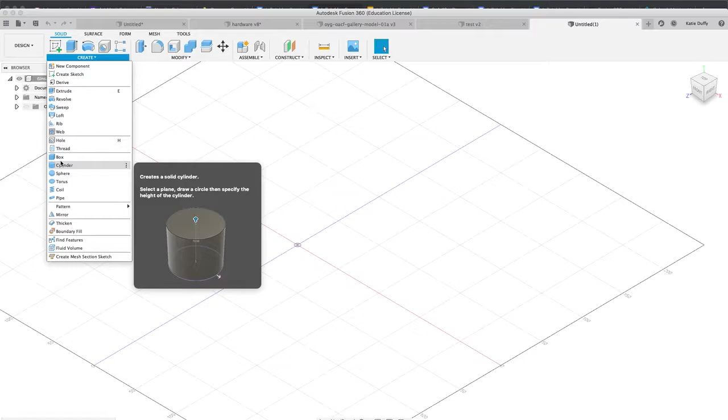So I'm gonna grab a box, okay? I'm gonna select the plane I want to work on, this bottom plane here, and I'm going to draw this box. Right now I'm in millimeters. I'm gonna switch it over to inches because y'all will have an idea of how much material you have, right? So I'll switch it over to inches over here.

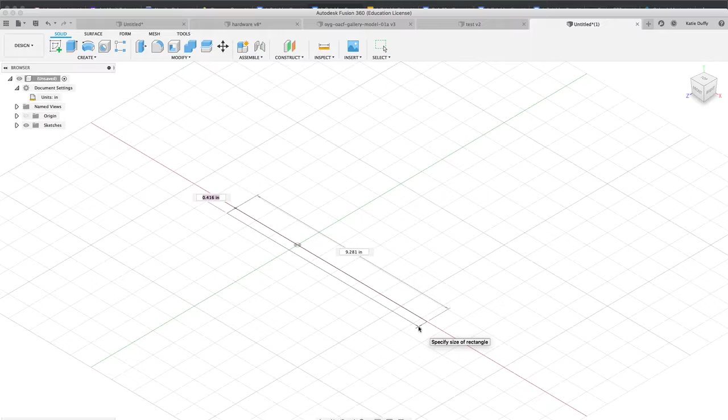I'm gonna grab my box again, okay? And maybe I want this to be like an 8-foot briefcase. So you could do it to scale, right? Maybe you do like 8 inches and then we can kind of blow it up, right? So think about your own scale. You could also do it as big as you want, right? So you could actually make it like an 8-foot box. I'm just gonna kind of eyeball it for right now.

Just think about your dimensions as you're making this, just because we're running out of time. Does that make sense to everybody? So like if you're doing 8 feet, maybe you do 8 inches, okay? You could absolutely do — what's 8 times 12? Art kids? Yeah, so you could do a 96-inch box, okay. But for the time being, I'm just gonna kind of wing it right now.

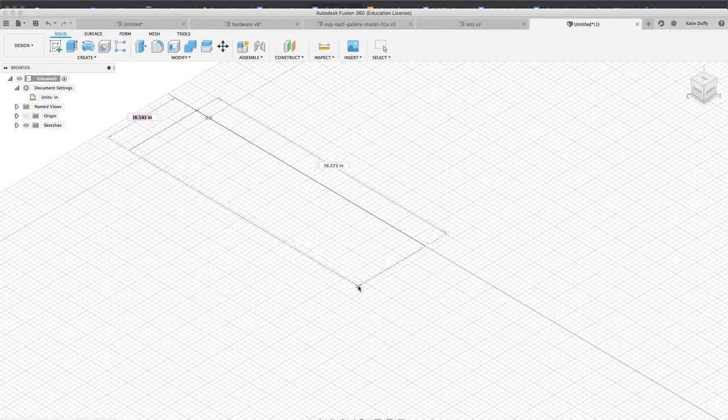All right, so I'm just gonna build up — this is gonna be my main briefcase. It's kind of briefcase shaped, perhaps. You're done — almost. But like a briefcase has, like, yes, but you would lose if this is what you submitted, okay? So what I want is, I'm kind of thinking the briefcase has like 2 parts. It has a latch, right? There's usually kind of a bevel in the middle. So that's what I'm gonna build next.

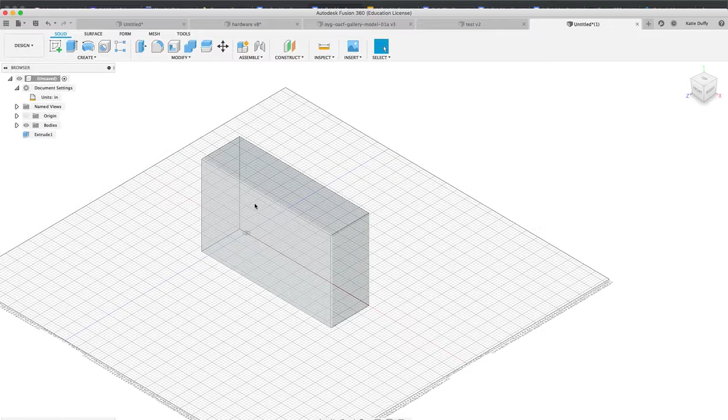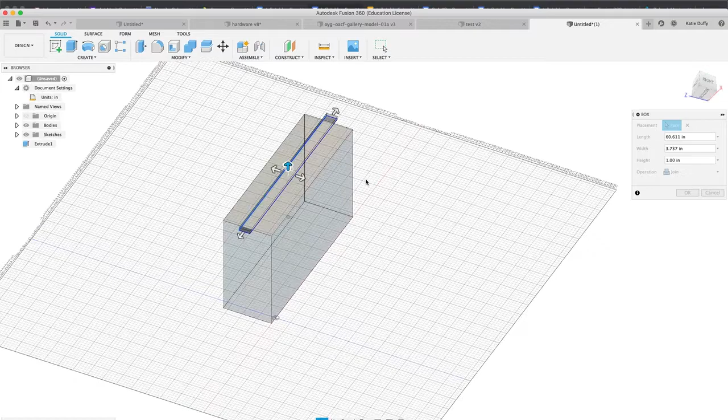I'll grab another box. Again, I'll select this front plane here, okay? And I'm gonna put this box in the middle. It's gonna be a little thinner. It's gonna hang off the sides a bit, okay? And then I'll pull it down.

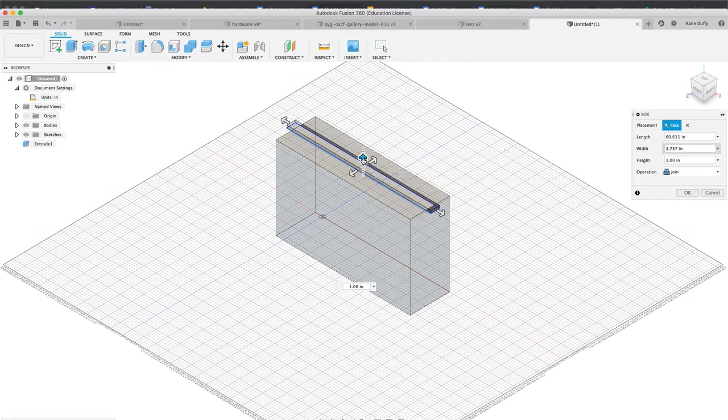This is moving so slow and it's throwing me off. I'm holding down Shift and the middle mouse button. And if you ever get lost, like I'm getting lost, if you hit this little home icon, it'll switch it up for you again. Okay, so I'm gonna pull this down. Right now I'm holding Shift and using my middle mouse button to move it around, to orbit, yeah.

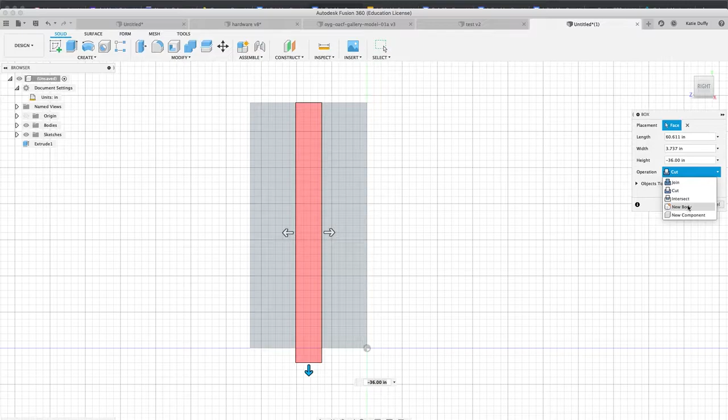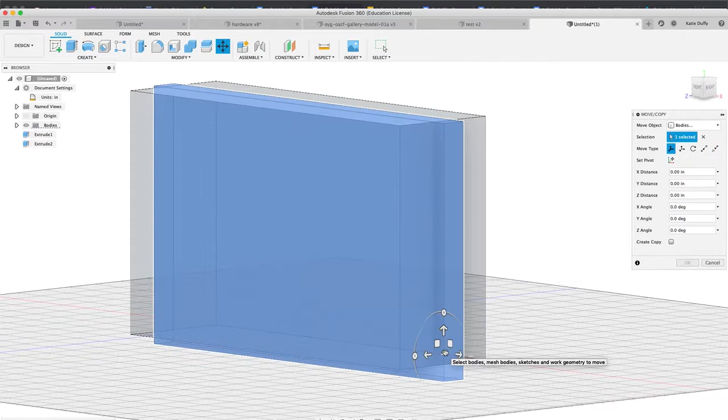So I'm gonna put this one up here, okay? And I probably want to drag this one up, so I'll move this down a bit. And I don't want to cut it — I want to make it a new body right now because I want to move this a little bit. Okay, so I made it a new body, so now I have just these 2 shapes, okay? So I'm going to move this one up a bit because I want that ridge to go up, so I'll do move copy. I'm just right-clicking on the form, selecting the form, and moving it up a bit. Oh my god, this is moving so slow. Okay, move it up a bit. Okay, so that's kind of my ridge that I'm going to use.

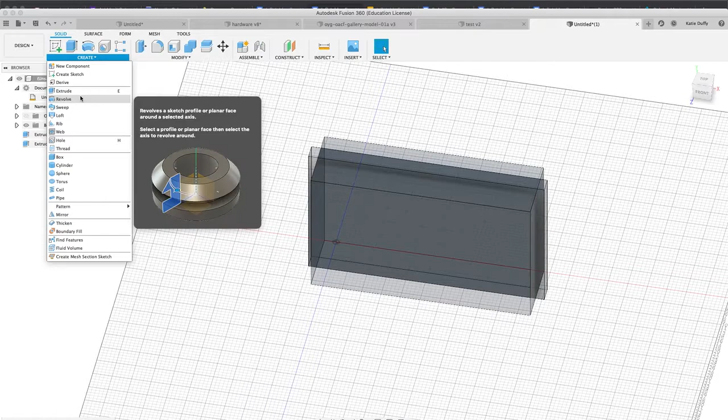And now I need a handle, okay? So I would recommend, again, just using your rectangles to make a handle. So what I'll do now is I'll grab another rectangle. I'm going to select this top plane to work on where I want to put it, so I'll select this here. I'm going to go to the top, and I'm going to make it about here. All right, so this is going to be one part of my handle.

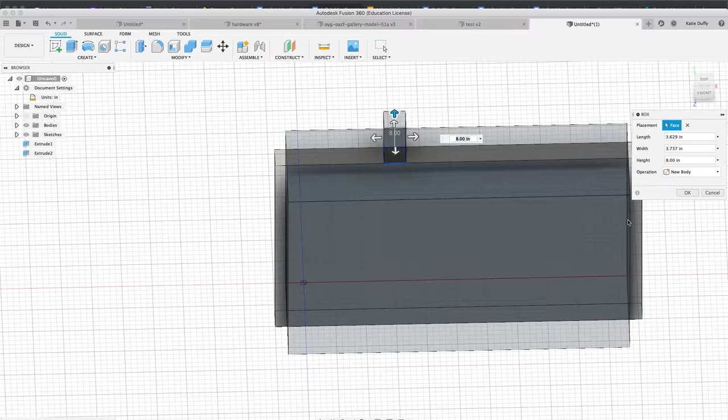Okay, and I'm going to do new body on everything, and then I'll join it later, just because I probably want to move things around. Then this one, I can right-click on it, do move copy, make sure the body's selected, okay? And if you hit this down here — I'll come back to y'all — that'll create a copy, okay?

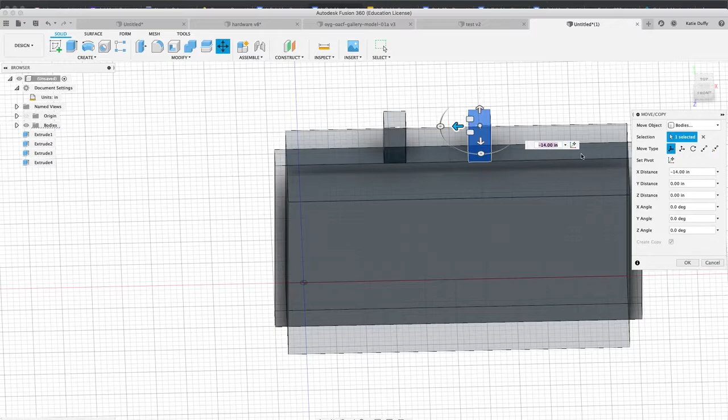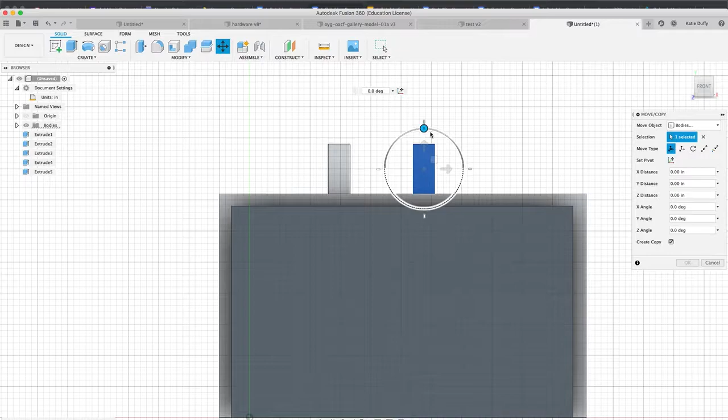And then what I need is I'm going to need another copy that's going to connect these two things. So I can do this again — another move copy, make sure it's on bodies, okay? And I'm going to rotate it 90 degrees and bring it up here. Zoom in a bit. Okay. Oh my god, the lag on this is driving me nuts.

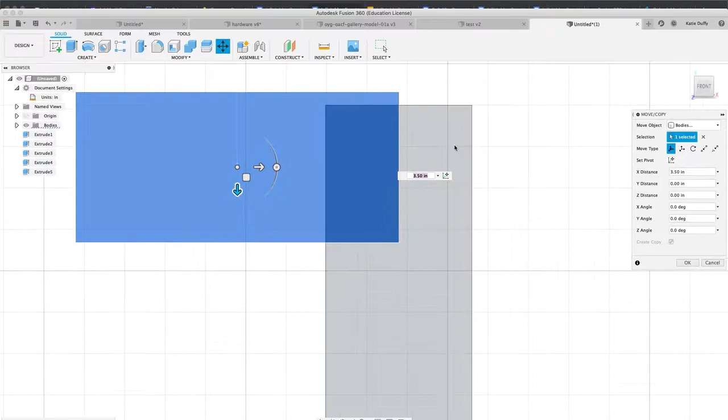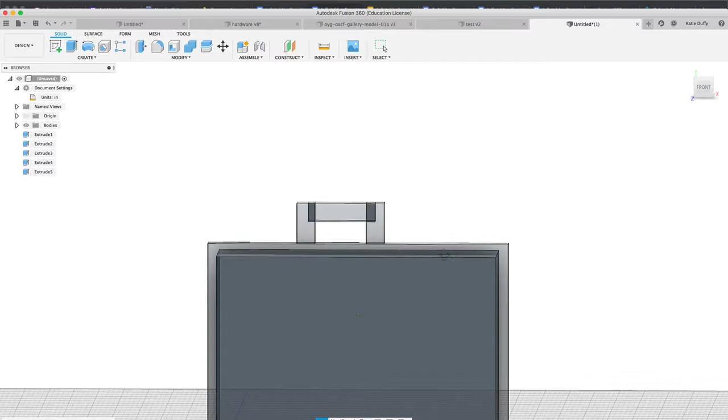Okay, align that one. And then I will come over here on this side, grab this one, do a press, pull it over here. Boom, briefcase shape. So, this is how simple your forms need to be, because you're really just trying to distill it down to its simplest shape.

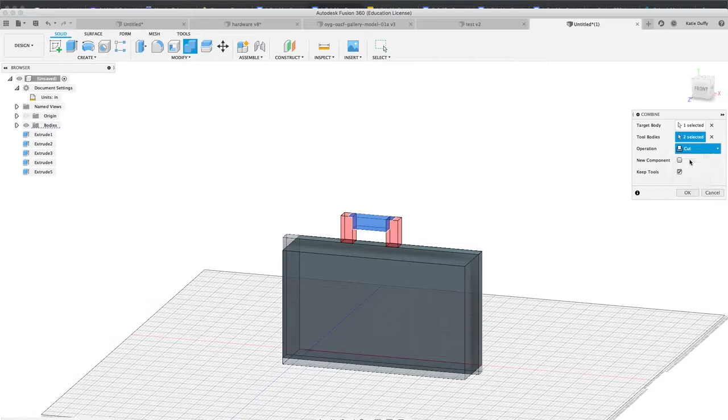So then what I can do, once I have everything in place, I can use my combine tool. I'm first going to just combine these shapes here. I'm going to do join. And then what that'll allow me to do is... oops, I think I kept the tools. Nope, there we go, get rid of those.

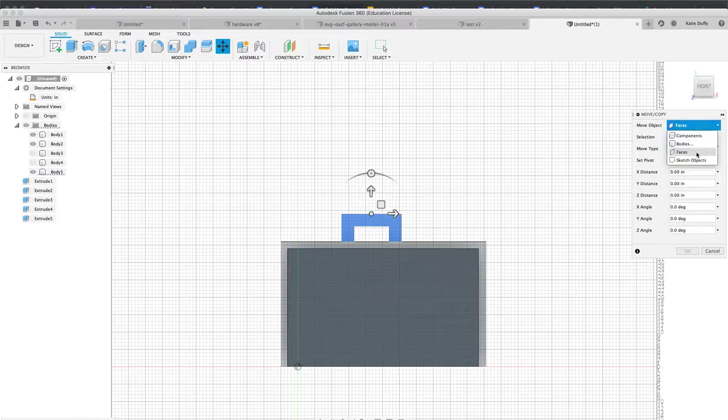I'm just going to move this over a bit so it's in the center. Again, I'm just going to eyeball it. Y'all can use your alignment tools, but I'm just going to kind of eyeball it for now. That looks pretty close, no?

Designers, am I doing okay? All right, thanks. Okay, and then I'll do the same thing here.

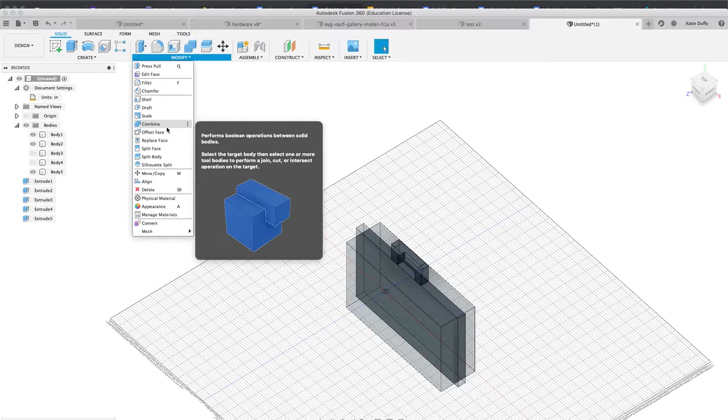So I will combine this shape with this shape. I'll join it. I'm not going to keep my tools unless you know that you're going to want to reuse that later. So now I have this briefcase shape, and you can recolor it if you're seeing through this, since this is kind of a semi-transparent material.

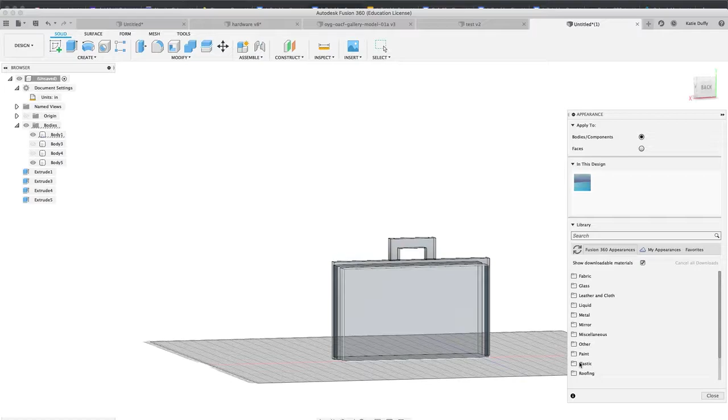This is a semi-transparent material. If you go to Appearance, right-click, go to Appearance, you can grab any material that you want. Plastic is usually a good place to start. So we can drag this on here, and then we can kind of see it a little better.

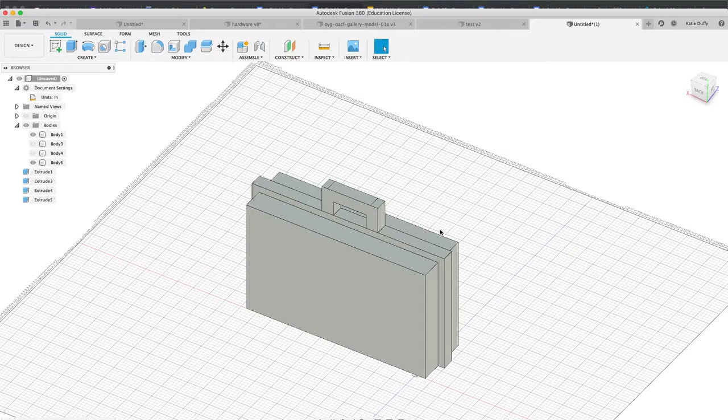Yes? What was that whole thing about keeping tools, not keeping tools? So, this is where you're going to be at a deficit because you don't have the prereq, to be honest, okay? But because we learned this program pretty well, make sure that you're in a group with people that know what this is, okay?

Keeping tools - so for instance, when I combine these, if you look at the screen, I combine these three shapes. The tools are like, I selected this one first, then this one and this one, so those are my tools to combine. So I can keep those tools. Check it out, it kept those two tools for me.

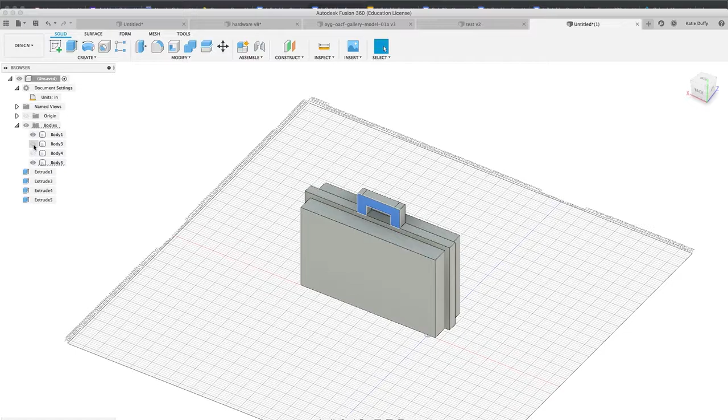Does that make sense? So it combines stuff, but it doesn't just get rid of everything. It keeps what you combined as separate objects. You still have them to work with, okay? Right now it's just one. I turn those off because I don't need them. If you don't do keep tools, it'll turn it all into one shape and you can't go back. Just think about what you're doing. And press undo - if you undo it, you'll be fine. But it's just a way to keep them if you're going to keep using those.

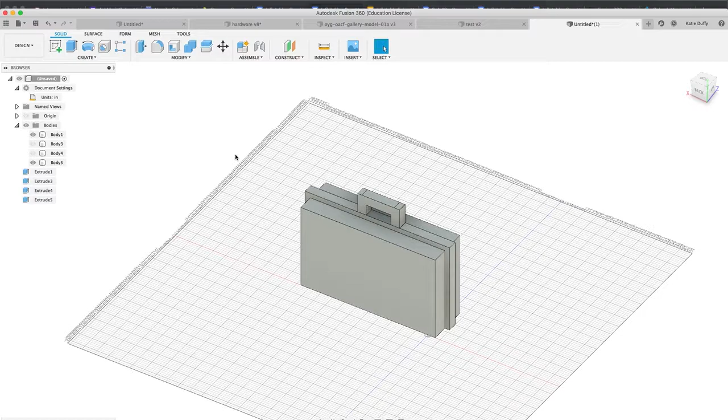So this is essentially how simple your form should be, because when you blow this up at a really big scale, it's going to look pretty wacky. And then there's other things you could do. We could put lights in it. If you really wanted to paint it, you could paint it. You could add some small things to here.

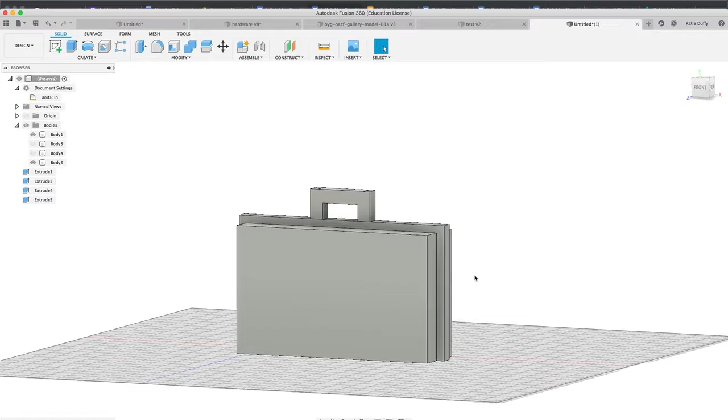Okay, so the last thing - how are we doing on time? All right, I just want you to make the form. Don't worry about the planes. We'll do that first thing in class when we get back because we're just running out of time. I will show you exactly how you're going to do that, though.

So what you can do, y'all, especially Fusion people, we never covered this, so I'll make sure we spend time on this the following Monday when I get back. You can actually export all of these separate pieces as sketches. What that'll allow you to do is give you the exact shapes you need to cut, and then you'll give yourself a seam allowance of 1 inch on the side of all those sketches. We're going to project those sketches, you're going to trace them, cut them out, and then we'll heat seam them together, okay?

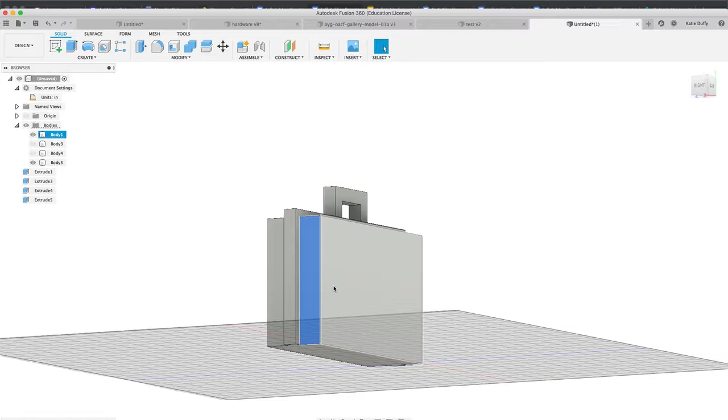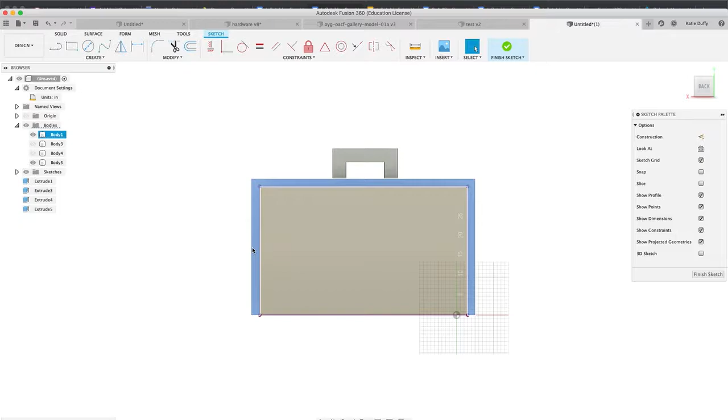So it's really easy, I'll just give you a preview. You select the face that you want, hit the letter P, and it automatically turns it into a sketch for you. So check it out - if I turn off my bodies, there's that shape, okay? Same thing with even this little piece over here - if I hit P, just hit OK, again there's that exact shape, okay?

And then you can decide, okay, I'm just going to cut these like, you know, chop it off here to make your life easy. Same thing with these weird little pieces on the sides. Notice it'll put them all on a flat surface for you, which is very nice - it'll put them on the plane that they are. So some of them we might have to rotate, because you just want to get them all on a flat surface.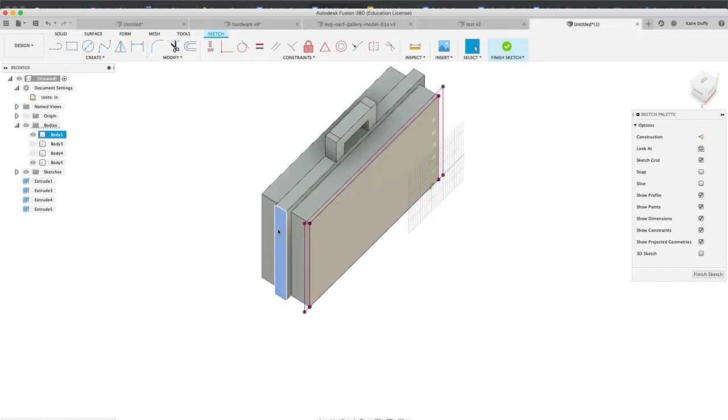Because, for instance, you definitely want to notice how this one here is literally the negative space of this one. So there'd be no reason for you to cut this somewhere else - you'd just waste a ton of your material. Does that make sense to everybody?

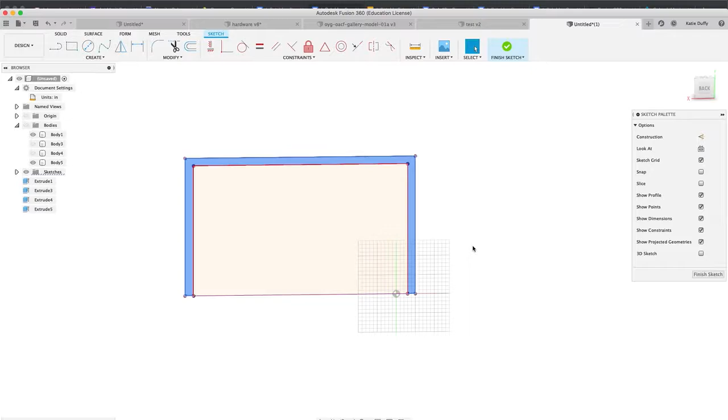So that's the process. Even if yours is built up as more triangles, or you have a lot more shapes, we're still going to be able to get - we're pretty much just getting the planes, putting all those planes flat, tracing them, and then assembling them into a 3D form. So we're kind of doing the opposite of what we're doing in 3D space. Okay, do you have any questions?